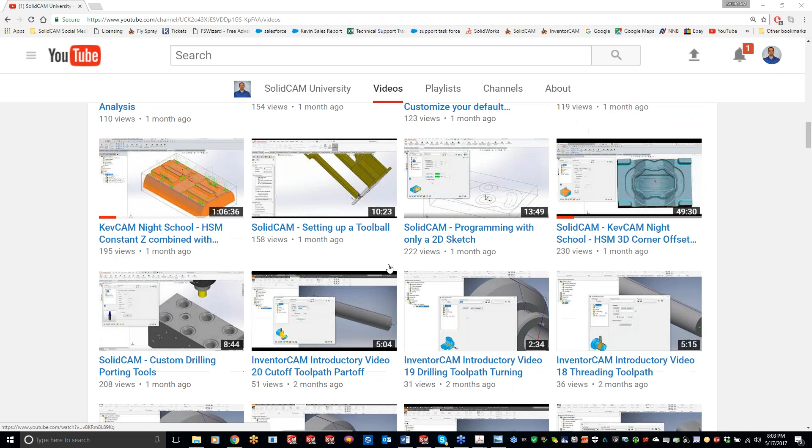But I guess with that said, we'll get going with tonight's class. Tonight is going to be HSS, morph between boundary curves and morph between adjacent surfaces. These are actually two of my favorite toolpaths in HSS, well actually in all of 3D, just because you have so much more control when you're doing morph between boundary curves, stuff like that.

Now, let me just look through our list here. I was going to wait, so last week we were talking about adjacent surfaces, or I'm sorry, perpendicular to a surface. And it kind of got to the point where we came up with some good examples, but in the real world I couldn't come up with something where I'd see a benefit out of it. And actually, Ronnie Kidder sent me over a picture.

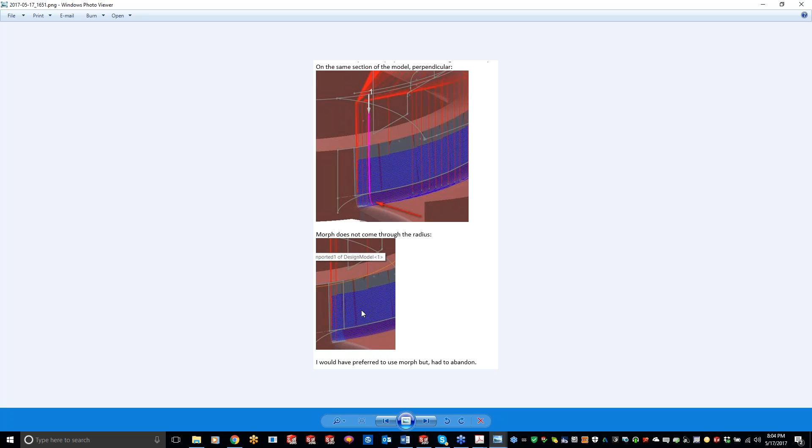Unfortunately I don't think Ronnie is here yet, but I'll open up this picture here for you guys, it's just a little screenshot. What he was actually doing here is he was working on this radius right here at the bottom, and he was doing a morph on this bottom, kind of what we're going to be covering today. You can see he's getting a lot of retracts coming up and down over here. So what he did is he switched it over to perpendicular, and you'll see it really cleaned up the toolpath. Unfortunately I can't zoom in here for you guys, but you can see right here we're not getting that jumping around like we were up here.

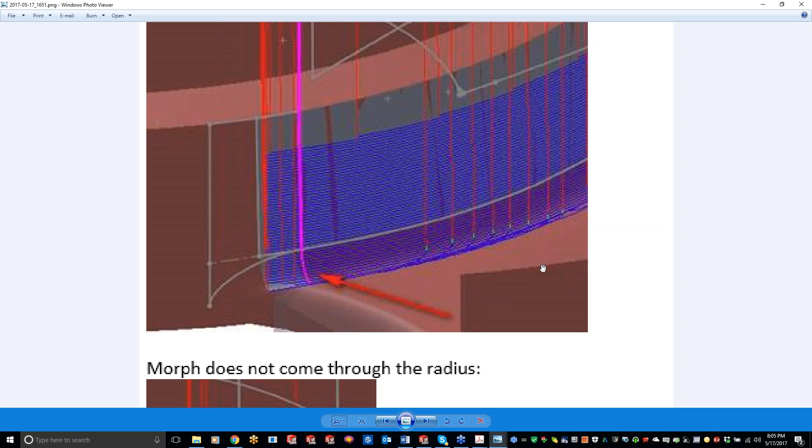So for those of you that were in last week's night class going over that, here's a good example right here. So, okay, we'll get the ball rolling here.

First thing I want to do is start off with parallel to curve, doing the exact same parts, and show you the difference between using parallel to curve versus morph between two curves. So what we'll do is go to HSS and do parallel to curve.

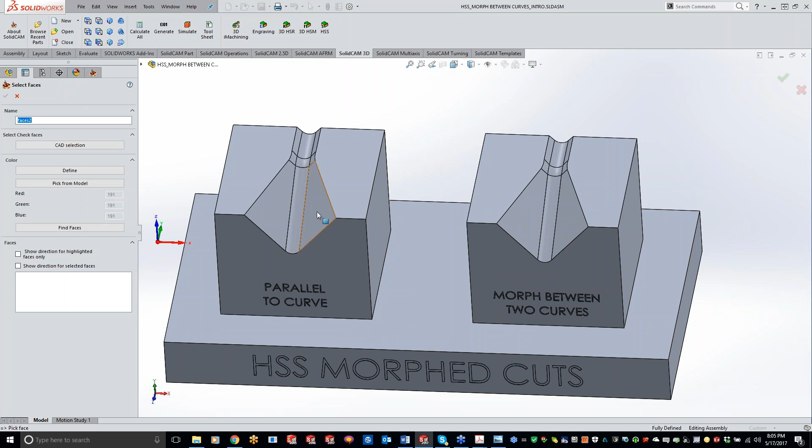My drive surface is the surface I want to cut, so I'm just going to grab my surfaces real quick. And my edge curve, I can pick either the left side or the right side here, but I'm just going to grab this left side, and we'll continue that right there.

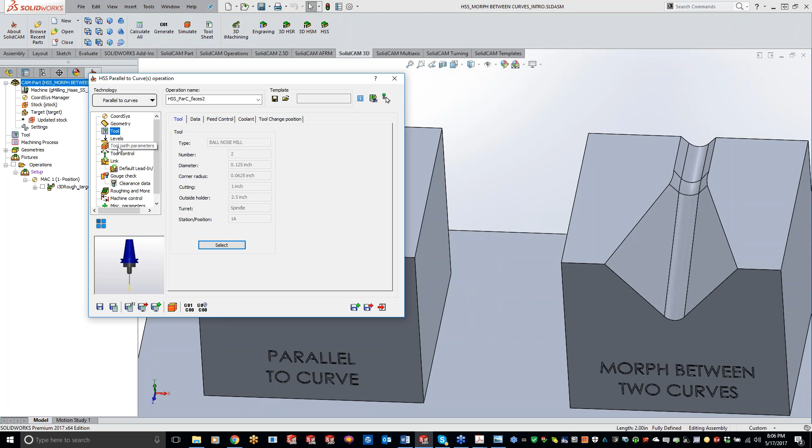Let's go ahead and grab a cutter here. I'm going to skip levels like I normally talk about. After I grab my tool, I'm just going to do save and calculate, and let's see what we have so far here. So we got a lot of bouncing around at first.

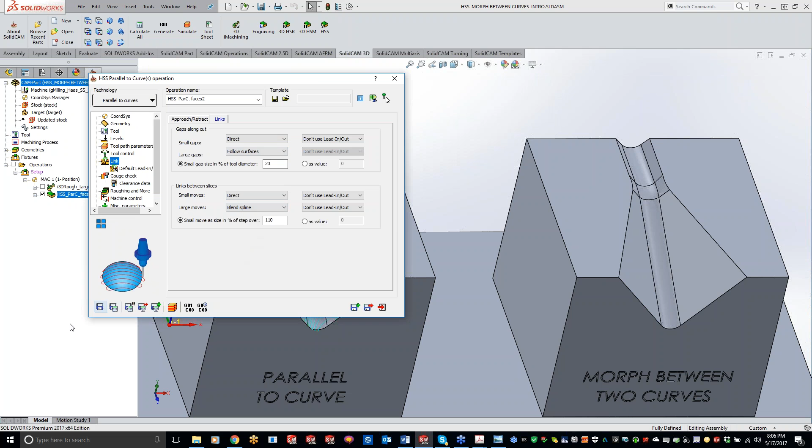So what I want to do is get that cleaned up first. Like we've talked about in the past, that's going to be in your links section. So let's clean up our links. For this top one here, we'll do follow surface, and for this bottom one, we'll do a blend spline. This should clean up all of our retracts. So now we got our retracts all nice and cleaned up.

But here's the one disadvantage of using parallel to curve on a particular surface just like this one. If we do a top-down view, you'll see we're going along with the surface right here of that edge line, but as it gets going out, it fades away. So if we do a top-down view for you guys here, you can see we got a nice toolpath on the left, but once we get over to the right side, we're not looking as good as we should be. So to accommodate that, that's why we have the morph between boundary curves.

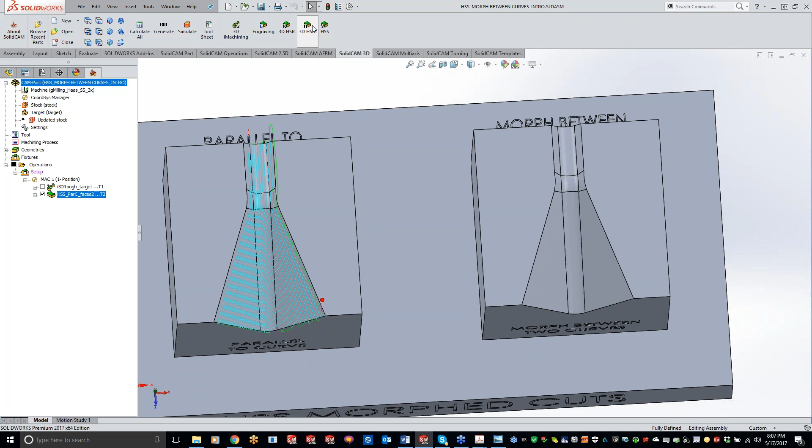So let's exit out of here and do a morph between boundary curves. Geometry, I can just grab the geometry I grabbed before, or I can just click on the surfaces, doesn't matter. And I need to switch this over to morph between boundary curves. Sorry about that.

Okay, so your start - now the start is where do you want to start your cutoff, and basically the end is where do you want to end the toolpath at. So for my start edge curve, I'll just grab this line right here, and basically what I'm telling it to do by clicking that start is I'm telling it to start over here and work its way over to this side. The toolpath will actually follow along those curves of that surface.

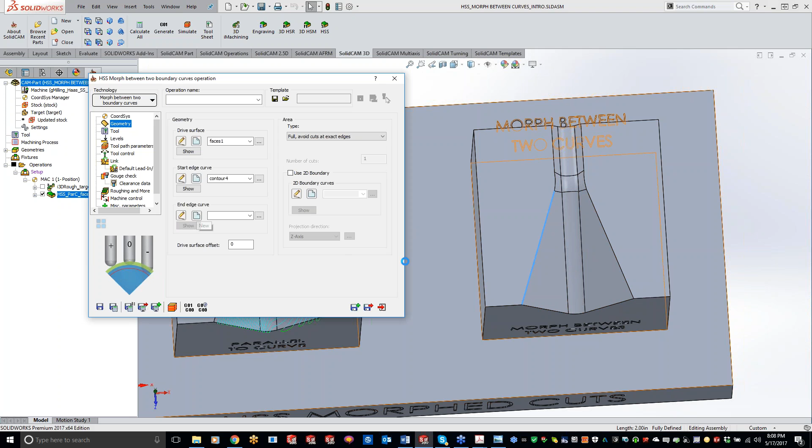So we'll come over here and we'll do our end. Okay, so now let's go ahead and grab a tool again. And for toolpath parameters, we'll do a save and calculate and see what we're looking at here.

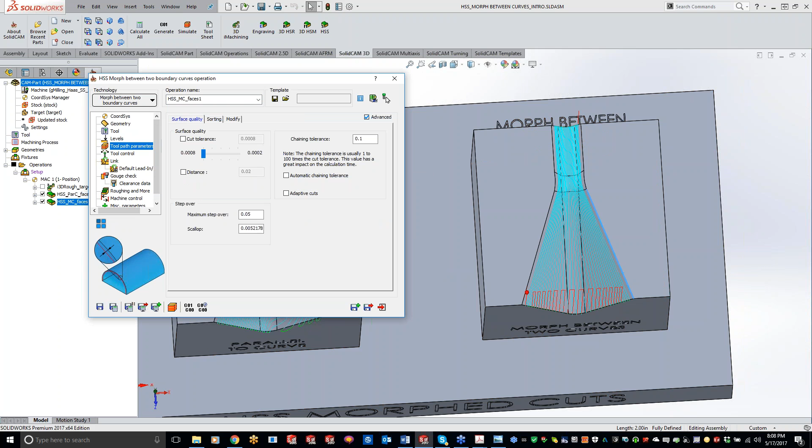So what we'll do here is, we do have a little bit of retracts you see just at the front half right here. So let's go to our links, and I'm just going to do the same thing as what we did before, follow surface and a blend spline. Okay, so that will clean up that toolpath.

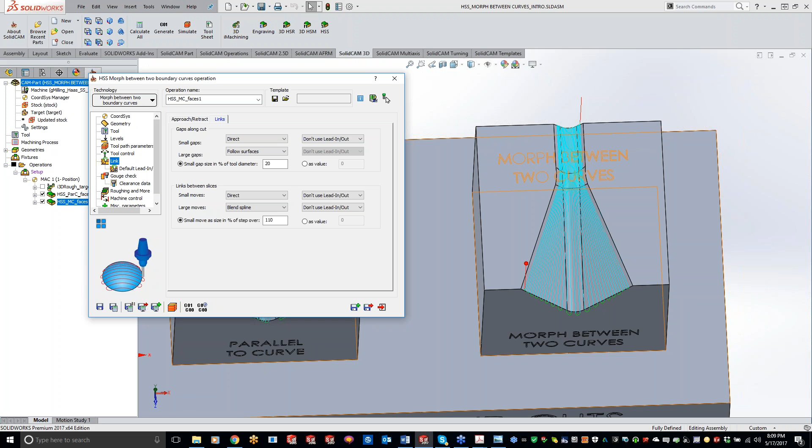And sure enough, Ronnie shows up. Ronnie, I was just talking about you and your part, showing them the part that you ran across.

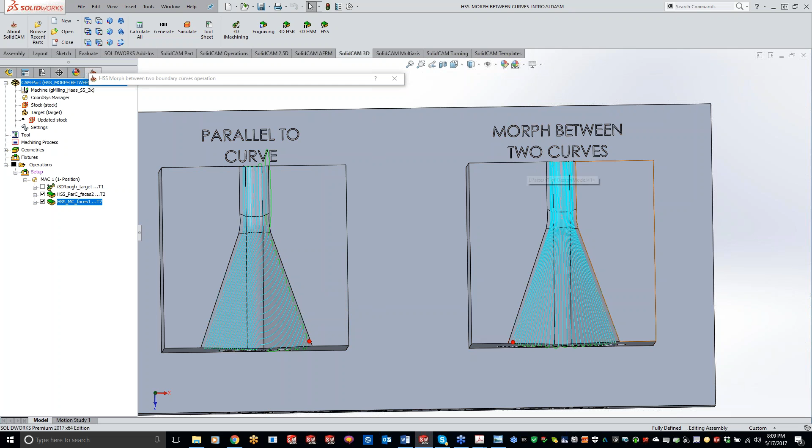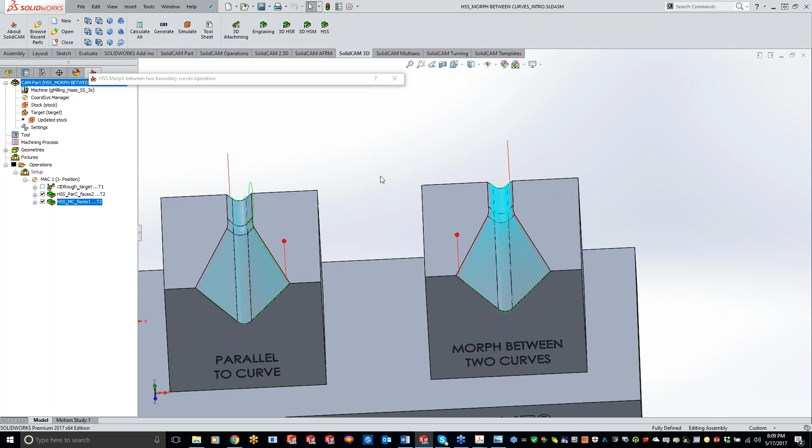Okay, so now if we do a top-down view of what's going on here, you'll see over here like we're following along, but since we're doing a parallel to that curve, as it gets over here, it gets kind of scattered. With morph between two curves, you'll see the toolpath really follows along the entire geometry right there. So as we go back and forth right here, it's following along that surface just perfect. You can see it following along here, working our way down, up and around, going all the way through. Now, like I've said before, get your guys' toolpath looking the way you want.

Grab your geometry, grab your tool. Do a save and calculate first, just to see what you got, and then come over to your links and straighten out any issues—you guys can do follow surface, blend, or direct, but definitely come in here and get those cleaned out. Then last thing is come over and tighten up your maximum step over. If we're looking for a nice finish here, we can just do 10 thou.

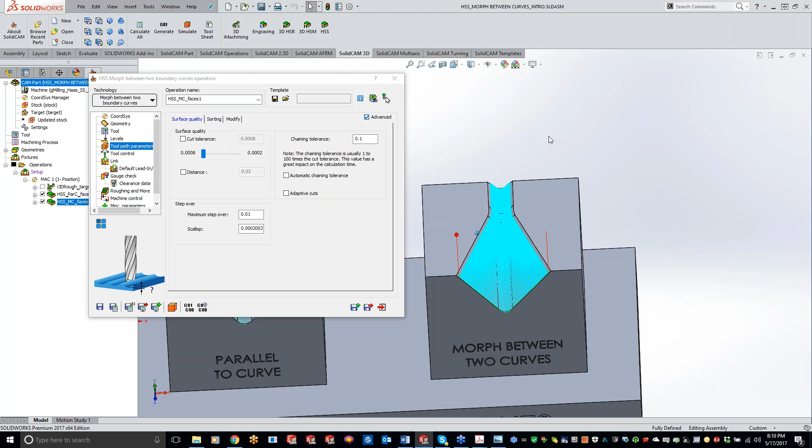Save and calculate, and now we're going to have a real nice finish going through that entire part, following along that geometry. So your start curve is where you want to start the toolpath, and your end is where you want to end it, and it's going to follow those curves exactly.

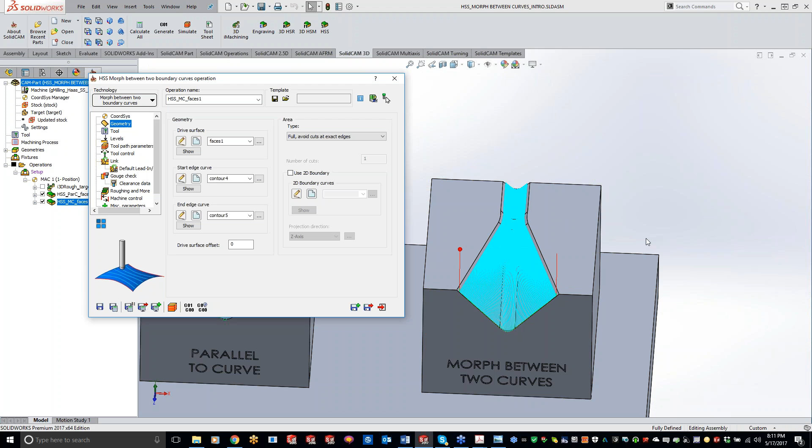Really easy to use. This is kind of one of my favorite ones just because you have so much control right here. I also like using this one if you had a radius around the entire outside of a part. What I would actually do for that is your start would be the top of the radii and your end would be the bottom.

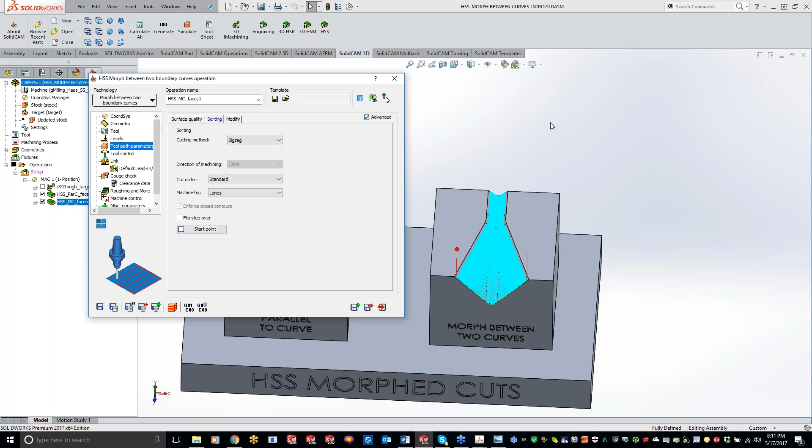Then what I would actually do is come over to my toolpath parameters, and instead of doing a zigzag, I would do a spiral. We'll actually cover that spiral one next. But any questions on this particular part and the comparison between parallel to curve versus morph between two curves?

Okay, perfect. So let's go ahead and we'll go to our next part here, and grab this guy right here.

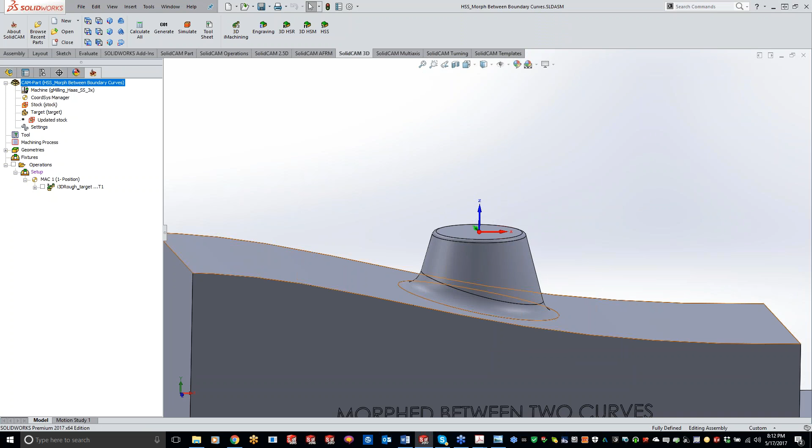What I'm going to kind of do is go along the same lines here—I want to do a parallel to curve and show you guys the difference, and then do a morph between boundary curves. So for this one right here, we'll just do a parallel to a curve, and I'll grab my 3 surfaces that I want to cut here.

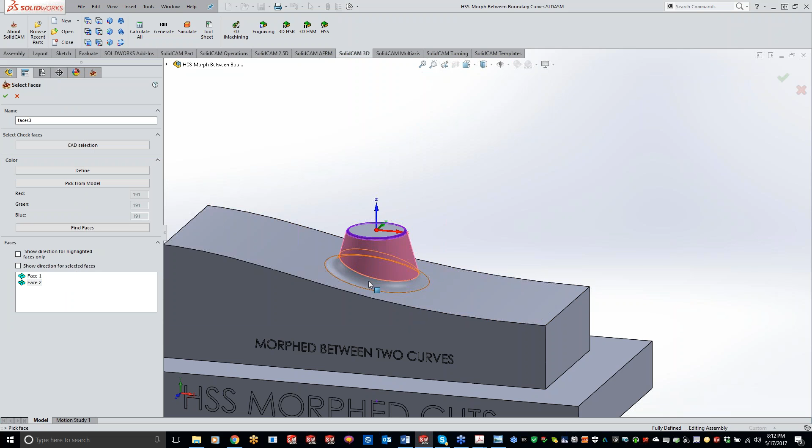My edge curve is going to grab the bottom right here. I could have picked the top—it doesn't really matter here. Now tool. Let's just do a save and calculate and see what we have going on here.

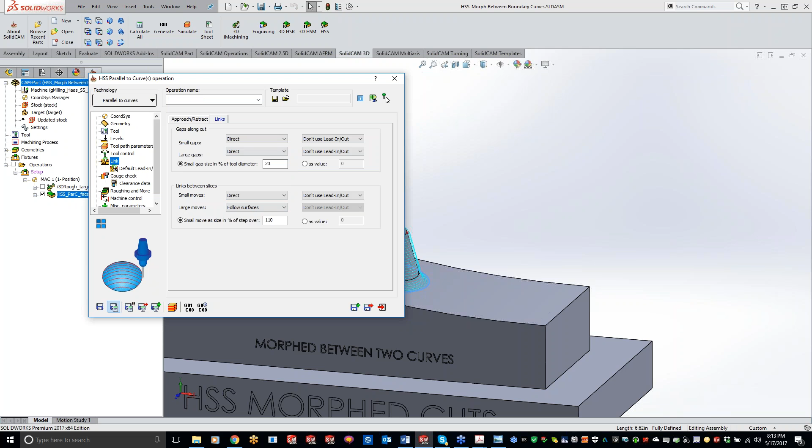So definitely getting some retracts here going on, so I'm going to get those cleaned up first. If we go to our link section here, for this one let's just try doing direct, and let's just do a follow surface. I'm just going to kind of push this part over here.

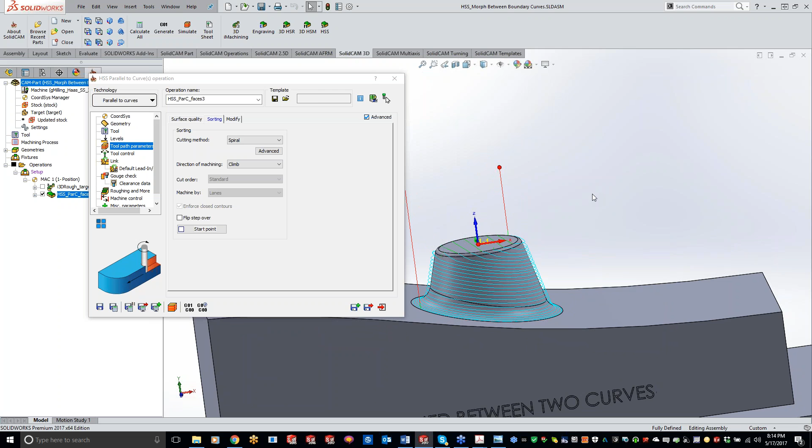So now you'll see, and I can clean this up a little bit better here—you'll see that I'm just doing a direct step down, starting at the top, working my way around here. Now if I go to my toolpath parameters, we'll switch this over to spiral. So we're spiraling down on the part, but you'll see it's not an optimal toolpath—we're kind of coming up over this flat where we've already cut.

So to fix that, what we can do is just do the morph between boundary curves. So what I'll do is grab our morph between boundary curves here.

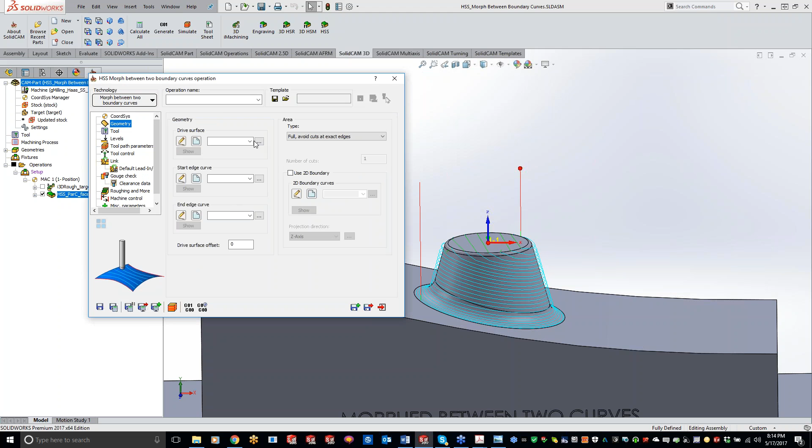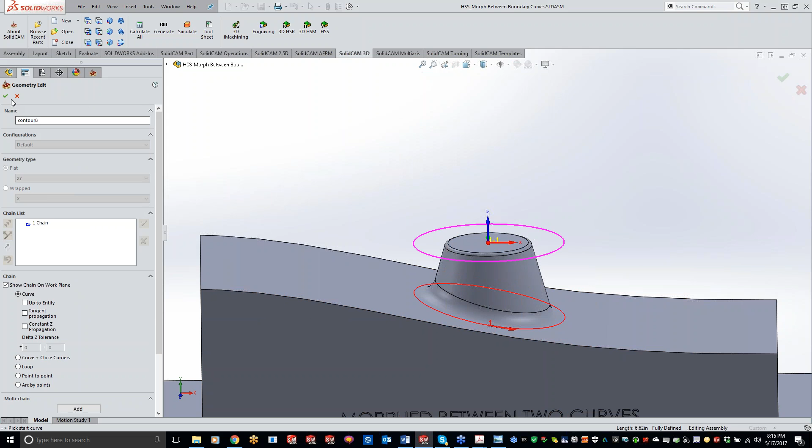And I can grab that same geometry here that I just picked. Now I'm going to turn off that toolpath, and my start is up here, and my end is going to be down here. So this is where it really comes into factor, since this island is kind of sitting up at an angle, this really comes into factor of your maximum step over.

So I'll get some toolpath on here and show you what I'm talking about. Right now, looks like our links are good to go. To clean up our toolpath a little bit and get a little more proficient, instead of just going around and stepping down, going around and stepping down, I'm going to get it so it stays in contact with that material, and the transition will be much smoother. So I'm going to switch it over to spiral here.

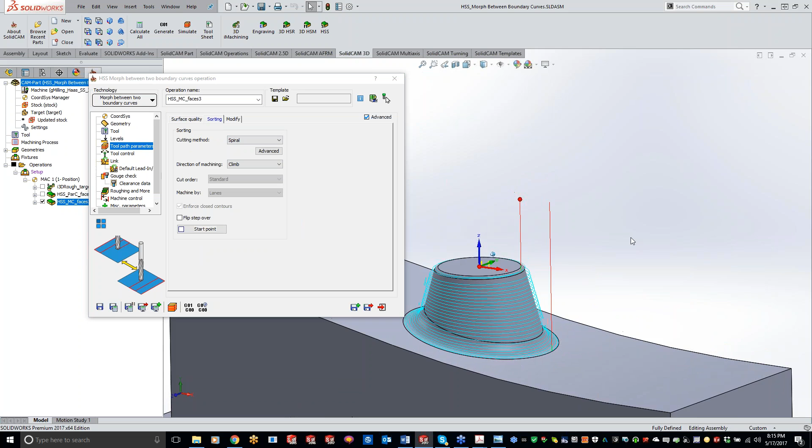Okay, so you'll see how much nicer that toolpath is looking, and it's following the surface of what's going on there. So we have basically a straight up and down start and an angle, or an oblong shape at the bottom here, and the geometry kind of contours to it.

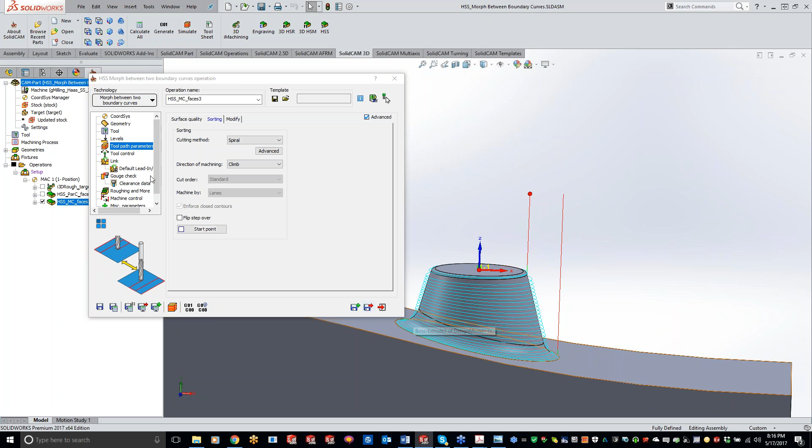So over here, our step over, when we have our toolpath parameters, our max step over is set at 50 thou right now. So we might have 50 thou over here, but we might need something a little bit smaller over here to accommodate that.

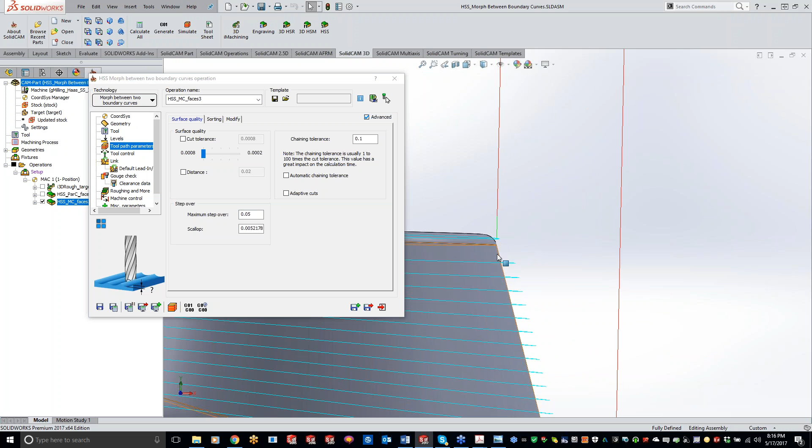Now, looking at this part, if we get a side view here, you can see we have a gap going on right here. The only reason we have a gap is because we're working on the tip of the tool towards the top, and then as it moves down the side, we're working on the side of the cutter. So definitely don't be alarmed by this at all, it's just because it's switching the contact point.

Now, if I wanted to lock it down, I could do it just at the radius, or I could do it at front. But since it's set to auto, it's automatically going to switch over. Now it looks pretty significant right now, but you have to remember we have a pretty large step over.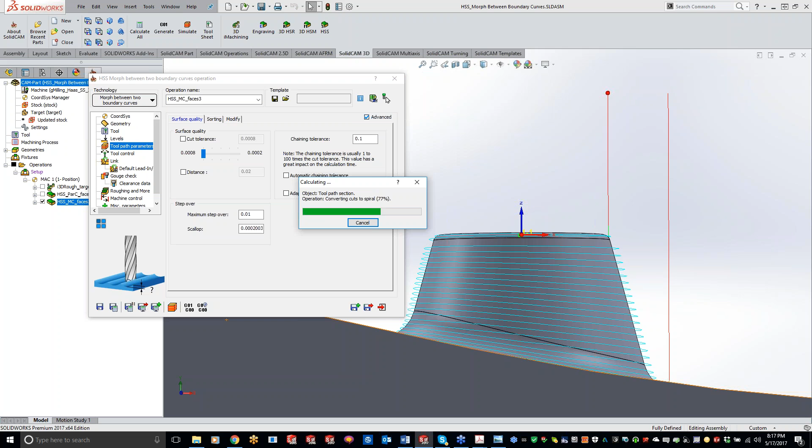So when we come back in here and finish this up, if we do a 10 thou step over, we have a nice clean toolpath going around here. And like I said, you'll still get a little bit of a gap right here, but it's just because it's changing the contact point of the tool as it's working around on that radius.

So like I said, we're working more of the tip of the ball down here, and then switching over and moving to the side of the ball going down right here. So does that kind of make sense for everybody?

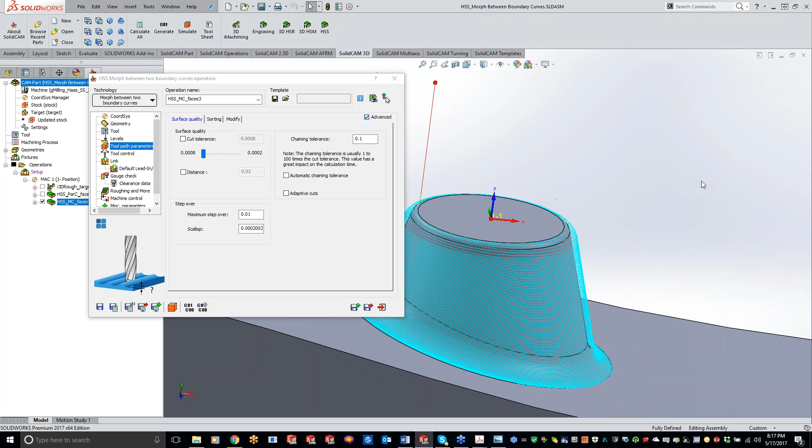Now, if say we don't want to touch the surface at all right here, we can come over to our gouge check, turn it on, and tell it not to touch this surface right here, which it shouldn't be touching right now. We do a trim and relink. There we go, so it's guaranteed not to move into that bottom half right there.

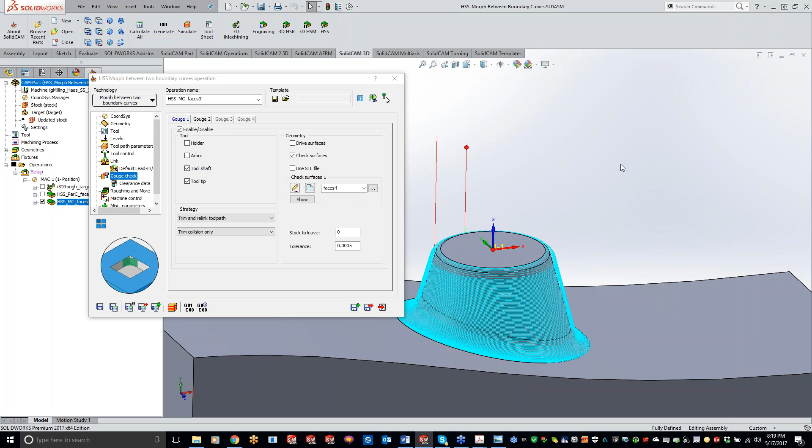Okay, so any questions on the difference between parallel to curve versus morph between curves, and when you'd use it, or anything like that with this part?

Okay, so let's go ahead and carry on to our next part here.

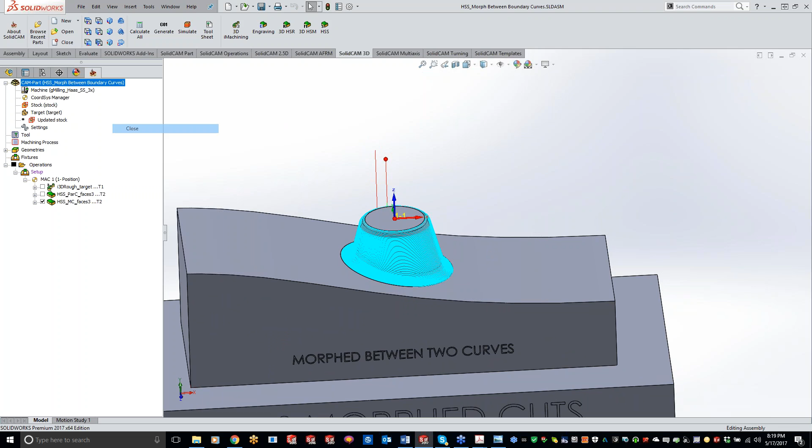And this part right here, I think this is the one I want. Yep.

Okay, so you guys will remember this part from when we did the constant Z and linear path, and we didn't get into the bottom half, and I told you we'd come back and show you that. So what I'm going to do here is break this up into two parts. You don't always have to break it up, but I'm going to do that and show you the difference of what's going on here.

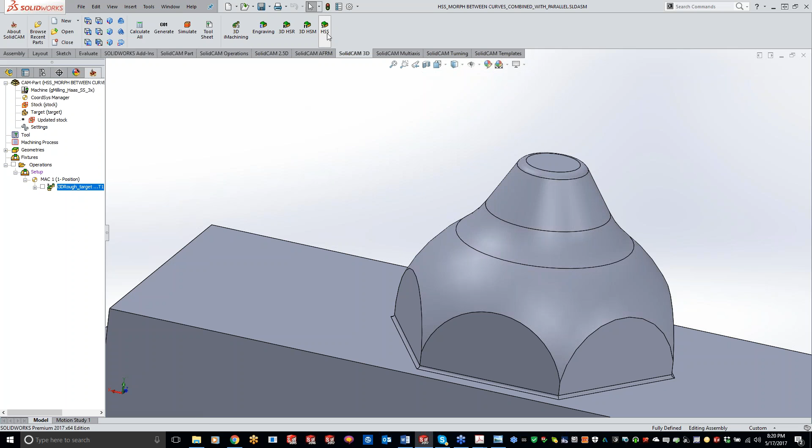So we'll just do an HSS here, and we'll do a morph between boundary curves. Now my geometry, I have it somewhere in my list here. And we'll do a start right here, and an end right here. Just give me one second here, guys.

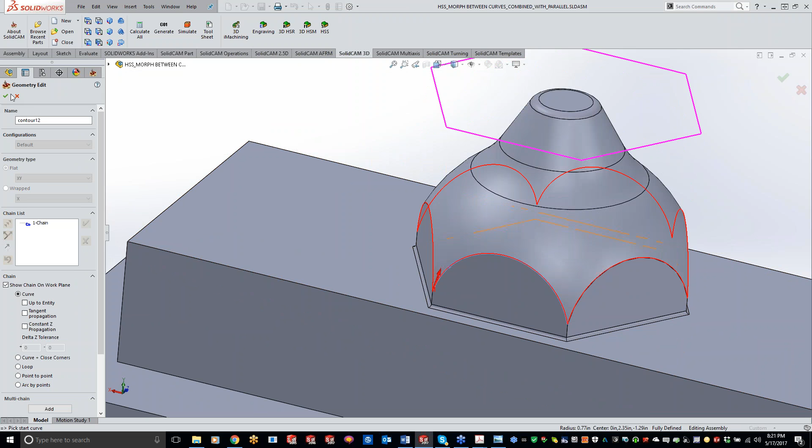So actually what I'm going to do is add this one in here. My start, I think I already grabbed it, and now my end is going to be down here. So we've got our hex and a round. Let's go ahead and grab a cutter here. And this particular one, I'm going to want to do it as a spiral.

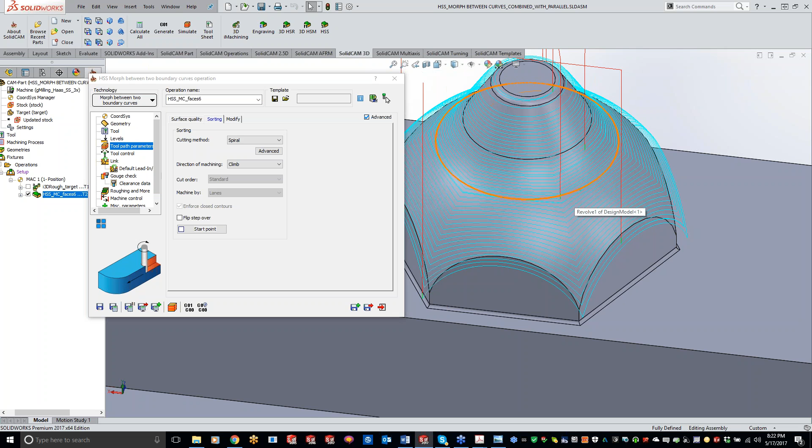Okay, so here's a little bit of an oddball example, but this is something I wanted to show you guys. When we are doing this, you'll notice that if we come straight down on the part here, that hex portion is really working its way up. It's working up too far. You'll see we're getting a little bit of retracts going on in there, and I can switch those over to follow the surface and whatnot. But for something like this, what I would rather do is break this up into two portions.

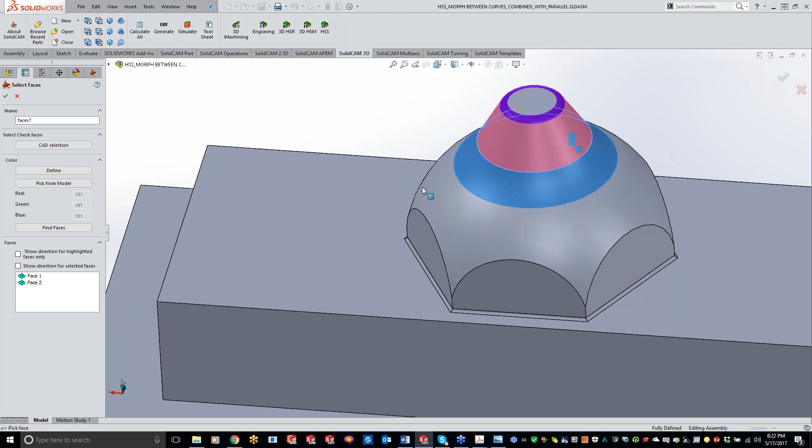So what I'll do here is turn off that toolpath, and we'll do the same thing. For my drive, I grab just the top half of that cone. My start will be the top, and my end is going to be down here. We'll grab that same cutter here, and switch this over to spiral.

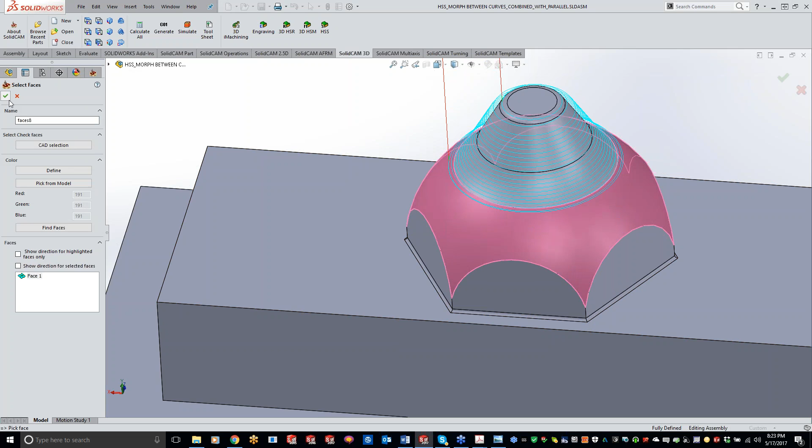Okay, so now we have a real nice looking toolpath going down up to that circle. So now I need to finish that portion off. What I'm going to do is save and copy, or start a new operation here, and leave it where we left off with that first one. So if I go to my geometry and grab that bottom piece here, my start's going to be where I left off with the original, and my end curve is going to be this kind of hex going on here.

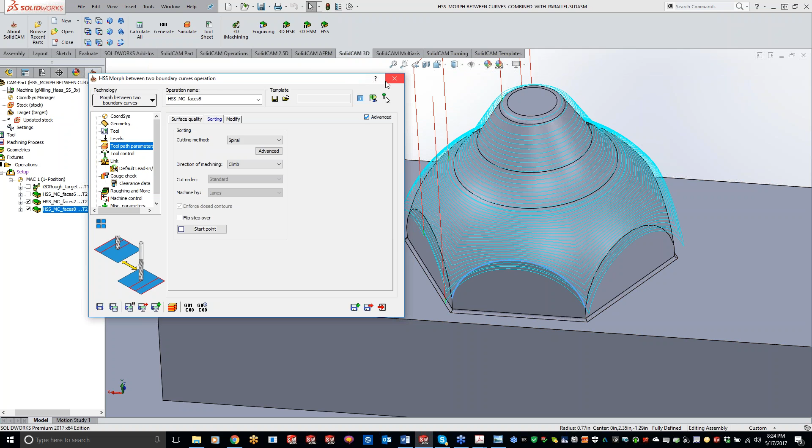And we'll put this back to spiral again. I'll grab a tool real quick. So this is going to be a much more ideal cut for this particular part here.

So you'll see that before, let's turn these off here, my hex was coming way up, even up into my circle here, and I'm not going to get a good surface finish when I'm doing these square points right here on a radii. So like I said, the best thing to do is break it up into two pieces here, so we have a nice smooth cone working our way down. And then since my new start is where I ended up with the previous operation, we're going into the circle, and now as we get into those hexes, it starts transitioning over for you guys.

So just thinking about a couple different ways to program stuff, like I said, we could do parallel to a curve on this one up here and get the same result, or do morph between boundary curves. But as the transition goes through here, we can get into a much nicer surface finish as it's following that.

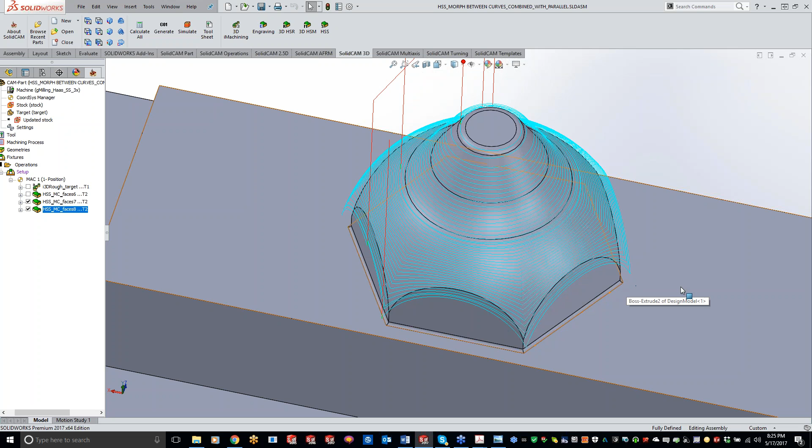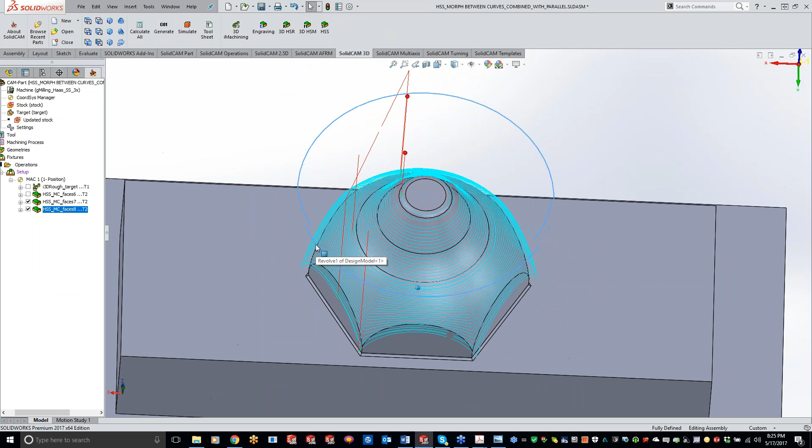Now, like what Ronnie was saying too, if we want, let's just do it as a test real quick here, let's just do a circle. Yeah, we'll just do a circle like that. I'm just kind of curious to see if we could clean up that first initial toolpath, or what we'll actually get here if we use that as our end.

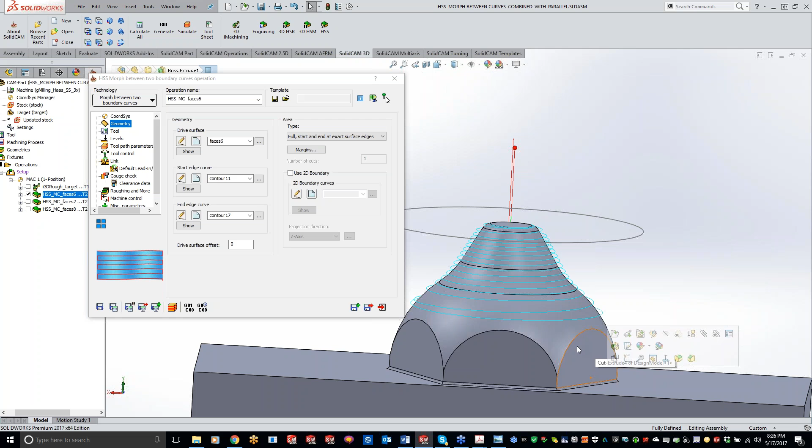Definitely get a lot of bouncing around there. Let's try cleaning up a little bit more, we'll do it at exact. So it cleans it up a little bit here, but we're not getting down, cutting our hexes like it should be. Let me zoom this part around here. Yeah, we're definitely not getting down into our hex area, just because it's trying to follow that circle geometry with that square, or that hex side of things.

So, definitely the best thing for you guys to do with this one is kind of break it up into two portions here, and you'll get that really nice surface finish that you guys are trying to achieve here. So, any questions on this part here?

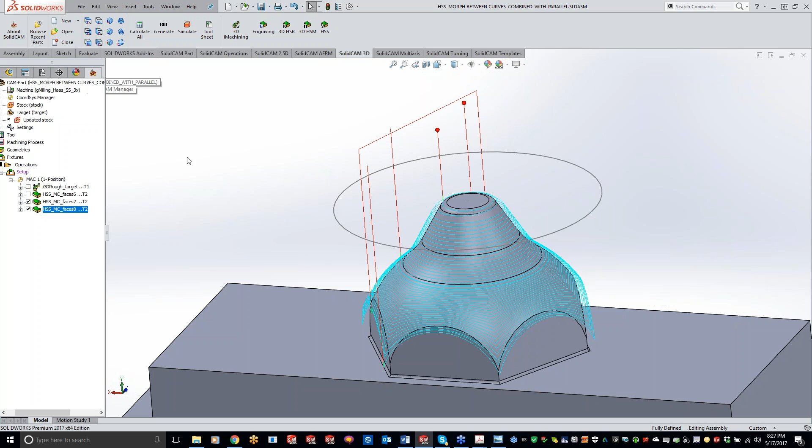All right, we're blowing through this tonight. All right, let's go ahead and hop out of here.

And now we will get into morph between adjacent surfaces. So right here, morph between boundary curves and morph between adjacent surfaces are extremely similar. This one's a little tough to find out a good part for you guys, also right here. The morph between adjacent surfaces is really built for the 5-axis, doing like impellers and stuff like that.

But you guys can most definitely use it as morph between boundary curves too. And this is one we'll really get into more when we get into cutting the 5-axis, especially when we get into the impellers, because this is kind of where the specific module is built for here. But we can definitely use it in a 3D setting here.

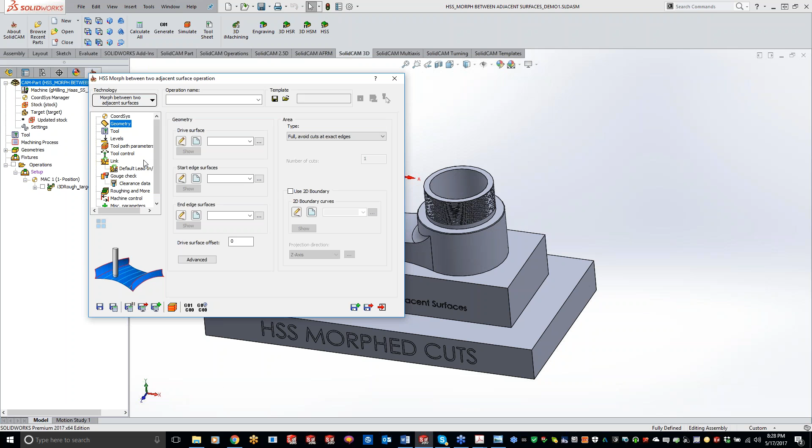So what we'll go ahead and do here is an HSS, morph between adjacent surfaces. It's basically the same thing. Click your drive - what areas do you want to cut? Your start surface - so we can do the left side or the right side first. Totally up to you how you guys want to do it.

We'll grab that as our end, and we should get the exact same results here. This is actually, if you guys can picture this, if anybody's into the dirt bike or snowmobile world, this is actually the piggyback shock in the reservoir, the cap piece for it there. There's a part sent in by a customer.

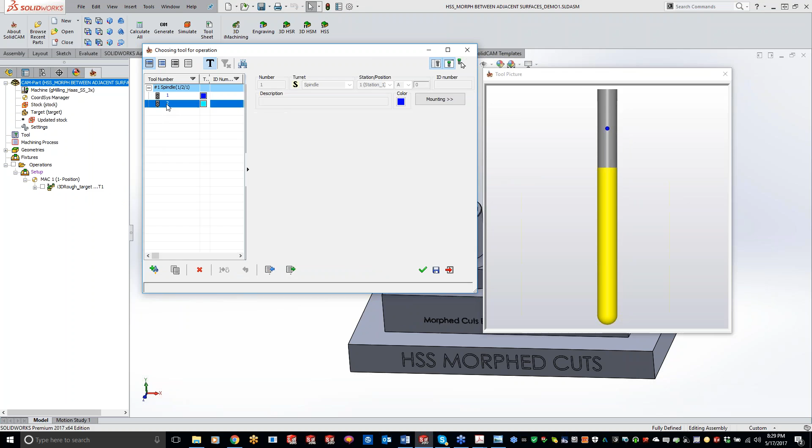And let's go ahead and grab a cutter here, and let's just see what we have so far here. Okay, so you'll see we're following along our surfaces here. Let's get our toolpath cleaned up a little bit first before we dive too far in here.

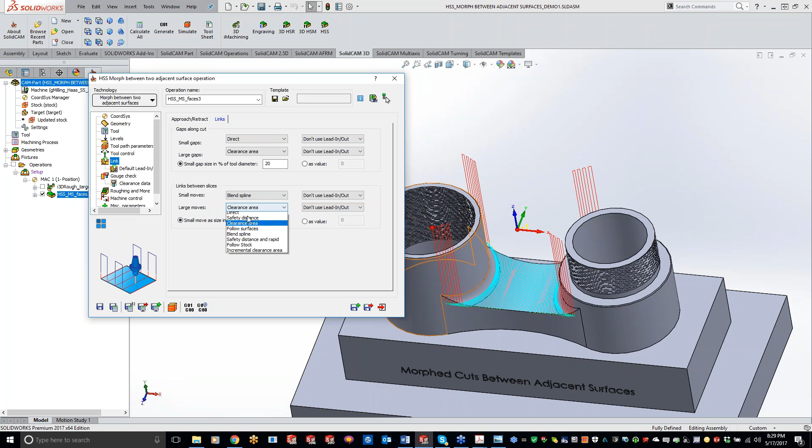So I'm going to go to my links, and for between slices we'll just do blend and blend. Okay.

So you'll see we're following the contour of that circle kind of going on right here, getting that radii cut out right here, and just working its way back. Now as it gets into the center, our toolpath actually straightens out here and now starts curving back towards this surface over here. So, real similar to morph between boundary curves, but you can also think of it as this is a check surface too.

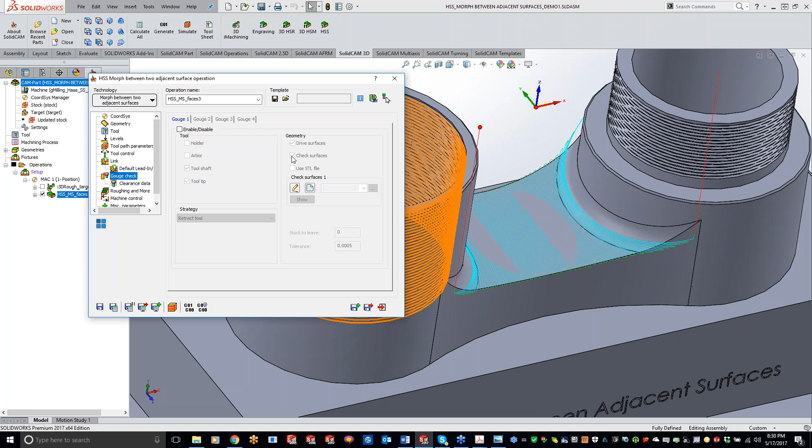So when you guys go to click on the surface, it's actually a check surface. So it's the same thing as if you guys came over here and turned on your gouge check for your check surfaces there. So it's not going to touch that wall at all, but it's going to get right up next to it.

And this one I had to do a little bit of reading up on, and the specific term is: the toolpath is generated between the check surfaces and evenly spaced over the drive. So it kind of uses this as a check surface - this is the drive that you want to cut, and it just cuts into everything in between, following the contour of what's going on there.

Now this is something a little bit funny here. So when I first got this part from the customer, I was noticing - you guys will kind of see right here - I've actually got toolpath that looks like it's going through the part. So what I did is I came in here and turned on my drive, or my gouge check, saved and calculated again, and it's still showing up for me.

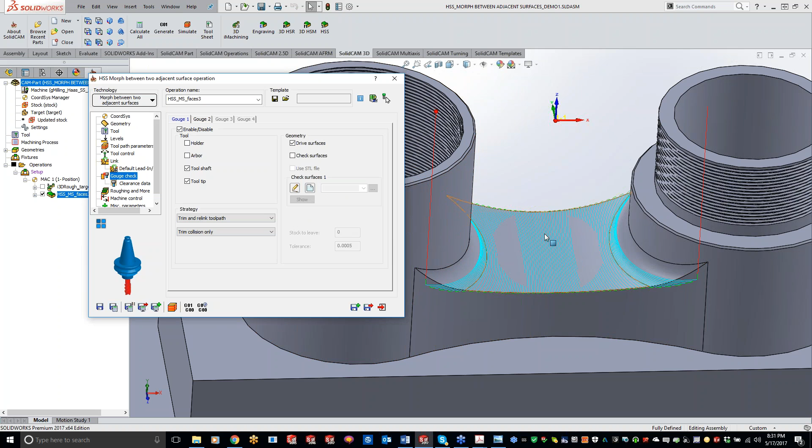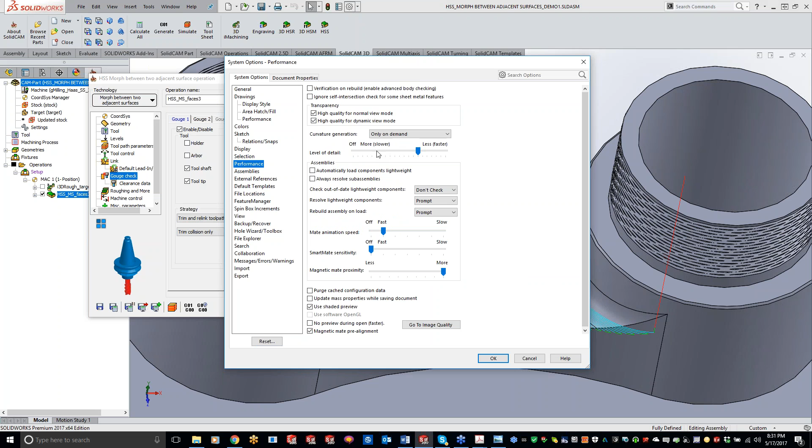Well, one thing that I wasn't watching for is, as I zoom out, you guys will see my toolpath all reappears. As I zoom in, it kind of goes away. This is kind of a SolidWorks setting here under your performance settings. So if I move this to more accurate, then it will show up like it's supposed to. But something to do with this particular part and the accuracy of the SolidWorks model is actually showing it sinking in there.

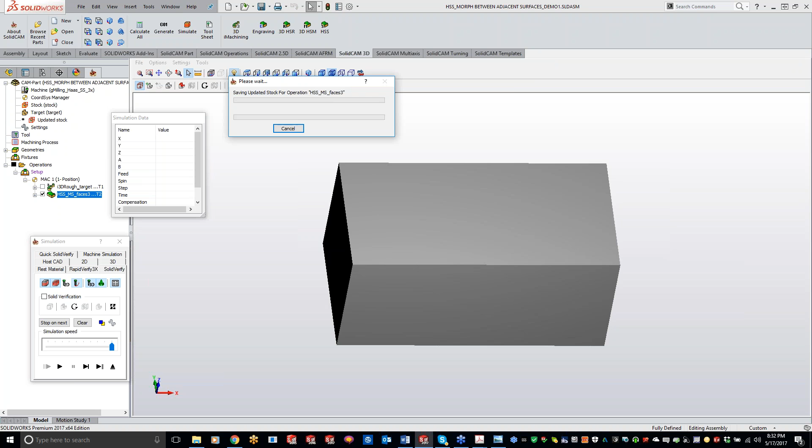Let me just play this one through and we can actually see it too. Simulate this. I'll just have to give it a second to update from that 3D machining here. Okay, so we got it nice, clean, and cut in there. And like I said, we're still stepping over fairly large right now.

If we do a stock target comparison here, everything's right up to size. And I got my tolerance set a little bit large right now. Now, it looks like in the center here we could be leaving just a little bit material, but we're at 4/10. I have my accuracy set to 1/1000, so it could just be a tolerancing issue.

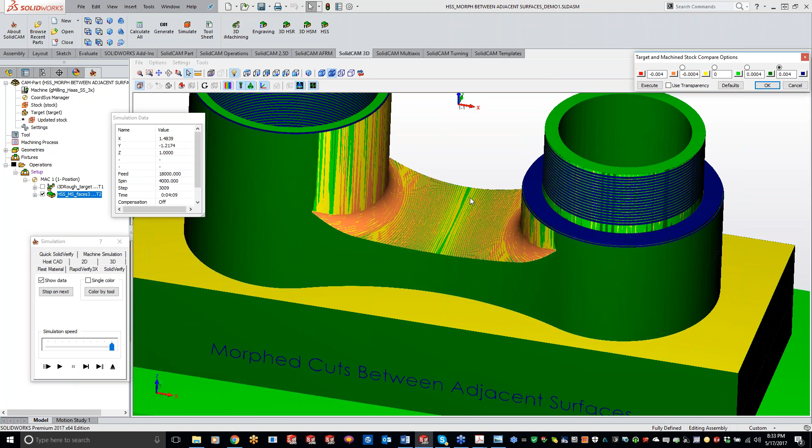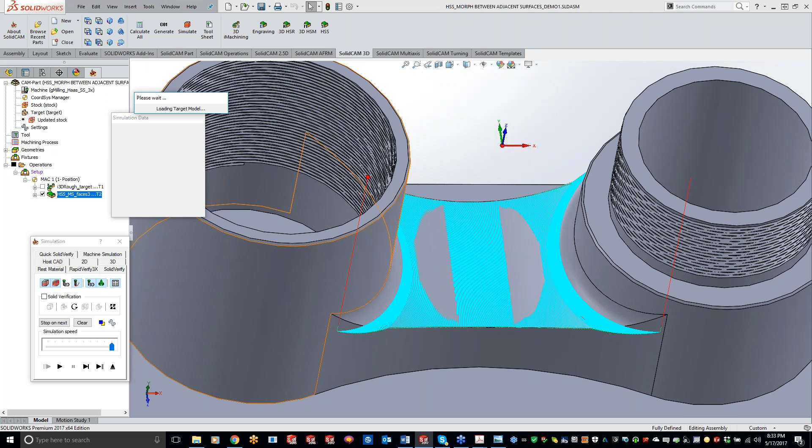But to get that smooth, beautiful finish, last thing I want to do is come in here and change up that step over there. And now if we do a simulate, we get nice and cut in there.

Just trying to see if it's just graphics. Yeah, it looks like we're all good here. Looks like it's just the shiny part of the center here. It looks like it's almost gouging in. I don't know if you guys can see that or not, but let's go ahead and do a stock target comparison here.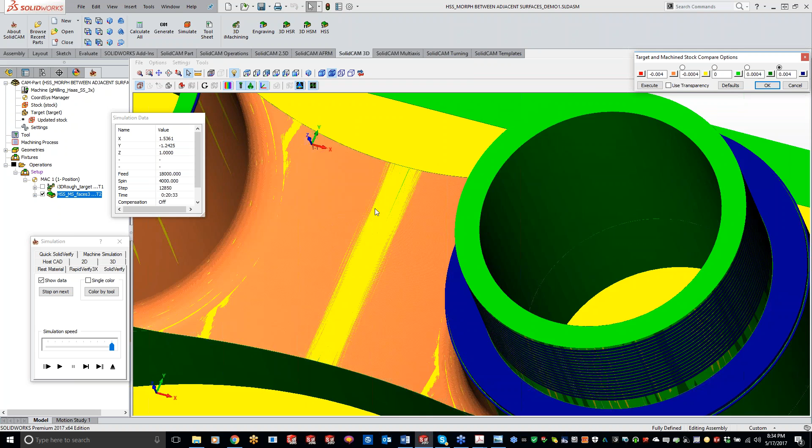Yeah, and we're cutting right up to size. Like I said, I have my tolerance set at 4/10. So if I'm seeing any yellow, orange, or light green on this particular part, I'm pretty much machined right up to size here. Now, obviously, I got a darker blue here where I got some material left over, and on my threads still got material left over, but I just did a quick 3D iMachining to get all that material out of there. Any questions, guys, on this part?

Unfortunately, this is the only one I actually have for morph between adjacent surfaces, just because they're so similar between morph between boundary curves versus adjacent surfaces. And like I said, the morph between adjacent surfaces is more geared towards the 5-axis impeller portion of it. And like I've said before too, the only difference between HSS and 5-axis is just in your tool axis control.

There's another box that's opened up right here. So for those of you guys that are a little intimidated by the 5-axis, once you get through the HSS, the 5-axis is pretty easy for you guys. So, but any questions, concerns?

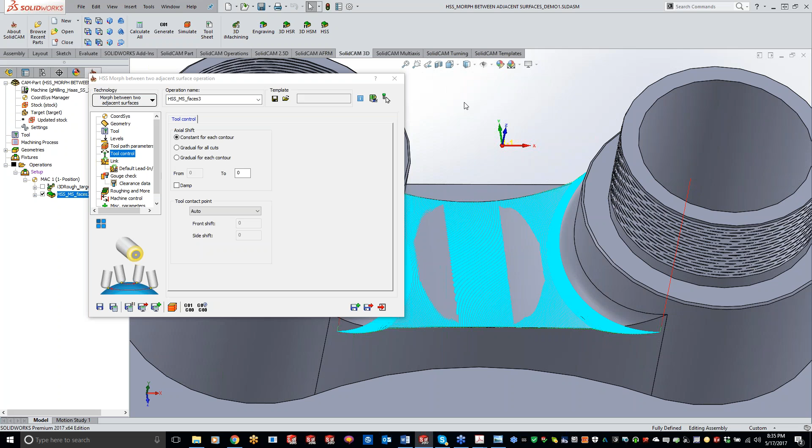Anything that I missed or that we should recover here? Said a little shorter than normal here. Not going the full hour, looks like, with this one, but I'm trying to give you guys as many parts as I can to show you the difference here. And like I said, with the morph between adjacent surfaces and morph between boundary curves are so similar that you're not going to be able to tell much difference there, I guess you could say. But like I said, it is using these circles as check surfaces.

No questions, guys? I see we got a couple people that have hands raised. Let me see here. If the tool is y-axis, so what do we do? Is the question from Mr. Desai. If the tool is y-axis, so what do we do? I guess I don't quite understand that question. Can you give me a little bit more of what you're looking for?

We'll see if we just hold on and see if we get a response from here, and I'll chime in if we've got it.

Yeah, Mr. George Lauer, I opened that big file that you sent me, and I think George sent me this file, and it's a character. I can't think of the name of the character right offhand, and I'm sure he'll pipe in and tell me what that character's name is. The character came in at, was it 56 feet tall, I think it was? It was an STL file of, I can't think of it right offhand. Trying to think. Here, let me, as long as we're kind of waiting here. Yeah, Baby Groot, there you go, from the Guardians.

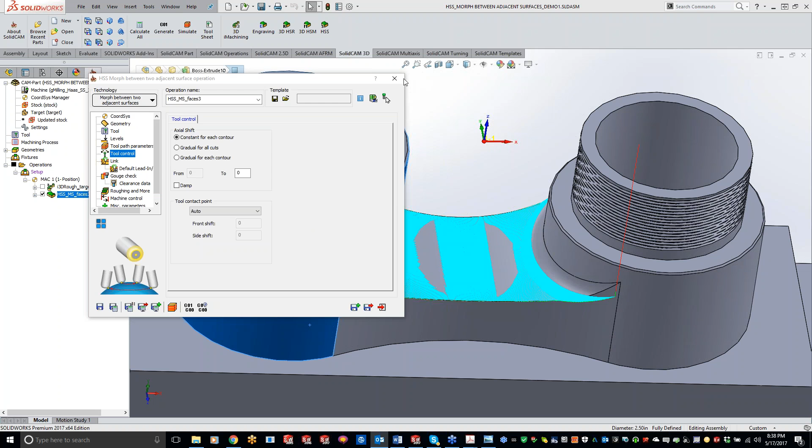Yes, to answer your question, yes. That's where you're going to want to use your keyway cutter, your morph between boundary curves. I don't have a keyway cutter set up here, but the inside curve is going to kind of be your start and end. Now, one thing I've kind of lost focus on, and I should have had a part built for it,

is HSS is the only toolpath out there that will do undercutting. So if you guys had a taper, if this cone was actually a taper going down at an angle here, and you guys were using a keyway cutter, or like a lollipop cutter, HSS is going to be the only one you're going to want to use.

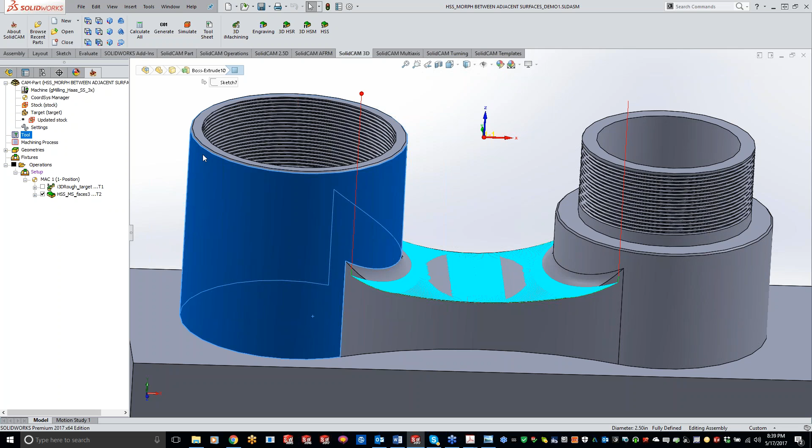And for that angle, let me reread it here. Have you ever tried cutting an angled bore through a part using a radius keyway cutter? Have it programmed ready for a part right now, and it looks good. I've just never tried using a keyway cutter in this fashion. Yeah, and to kind of explain, the keyway cutter is kind of like a slot mill with a full radius.

So let's see, we are at a 0.25. Oh no, I did cutting height there. Here we are. So is this kind of what you're using right now? It looks like, okay, sounds promising. This is the same way I programmed the part.

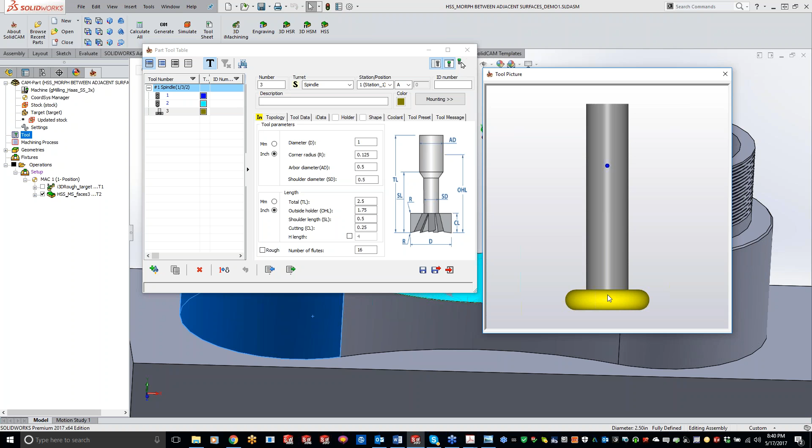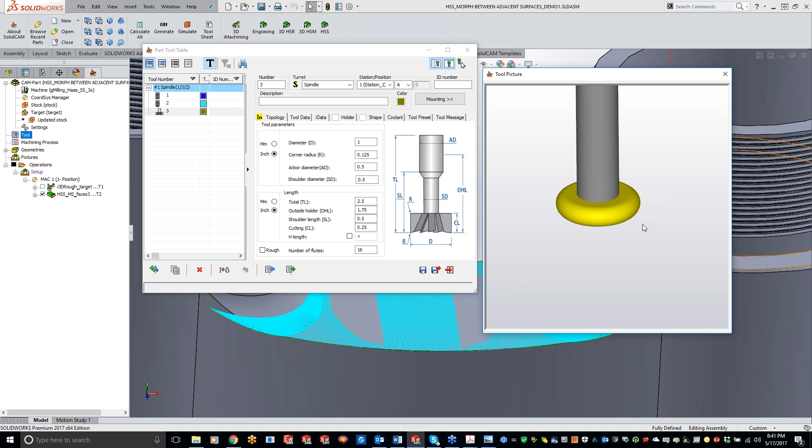Okay, so what he's trying to do is taking a full radius keyway cutter and coming in at different angles and stuff like that, and absolutely, especially if you guys can see where my mouse cursor is, if you're cutting a radius like this, definitely you can use that tool. Same thing for doing those undercuts I was talking about, this is going to be your go-to tool here, or like I said, a lollipop cutter.

So when you're doing that cut, just keep in mind, let's see, no we don't want to save it, make sure you go to your sorting and switch it over to a spiral. So you keep that tool in contact, doing a nice spiral in there, and you should come out with a really nice finish.

Oh, George said it was 56 millimeters high. Yes, he did. And if you guys want, give me one second here and I can show it.

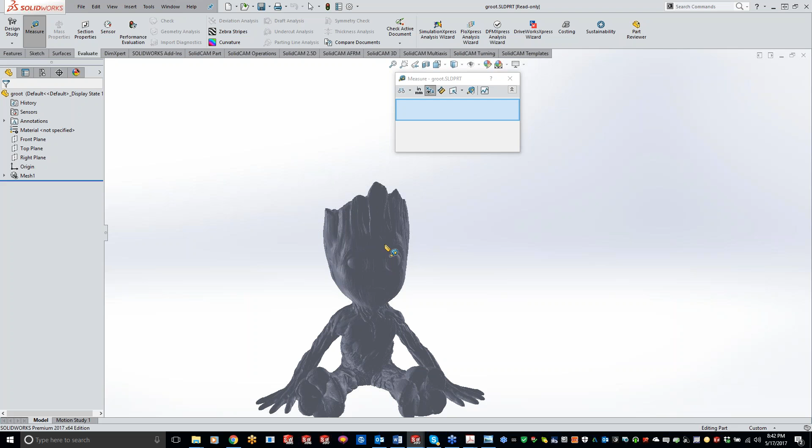Big file, baby Groot. Groot, or Groot, I don't even know what these characters are. Yeah, you're missing out, man. You got to go see Guardians. Yes. Oh, that's awesome, that is awesome. So here is baby Groot. And now if I click, I could have sworn I measured this out and it was much taller. Let's go to measure here and go to the bottom of his butt here. Oh, it's a mesh, I can't get it right now. But so there's baby Groot, or did I say it right? Groot, yeah, Groot, you got it. That is fantastic looking too. That is, absolutely.

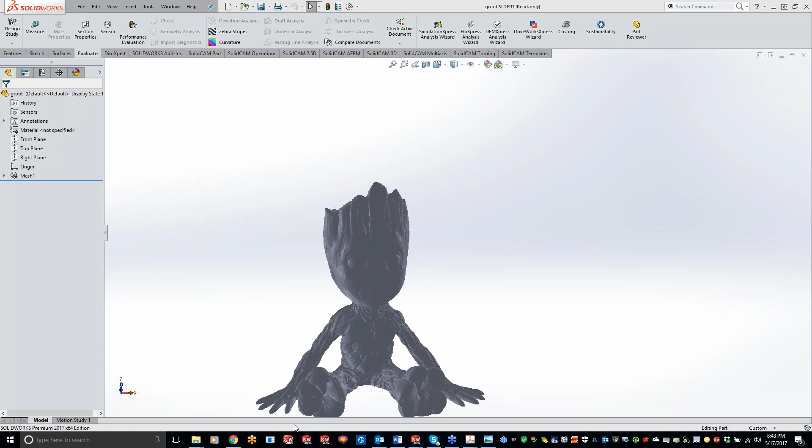So, okay, Ronnie got on. You can also use a circle segment cutter. One example is a barrel type, it has a large 2-inch radius. Ronnie, do you have a picture of that cutter by any chance? Ronnie's given a recommendation of using almost a different tool here, a barrel type. Okay, so he's telling me to go to a website here. Yeah, so let's just type in Emuge.

And in mills, barrel type is essentially a lollipop with an ellipse instead of a full circle. Okay.

He's giving you a link there. Yeah, thank you, Ronnie. I'm really curious to see what this tool looks like.

So is it a taper kind of ball right here? Because it looks to me like it just has a quick barrel. Okay, so it gets wider right here and then narrows down. Okay, God, I've never seen a tool like that. Very cool, let's see.

A few months ago there was a big article on them in Modern Machine Shop, and I would assume these tools work great, obviously they're doing a write-up in Modern Machine Shop. For Mr. Canyon, sorry if I butcher your name here, let me put this link in the GoToMeeting chat so everybody can have it, and that way you can try that out too. But yeah, thanks, Ronnie.

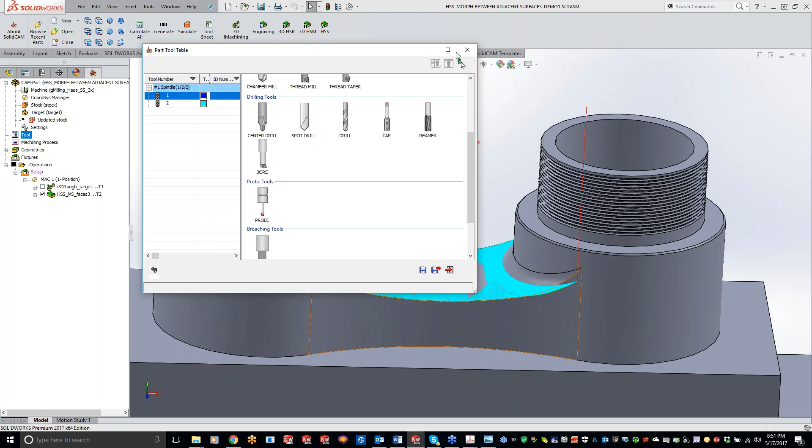Now, next week we are going to be covering the last portion of HSS, I think. Yep, so we're going to be doing projection, user-defined, radial, spiral, and offset. I think I have these all grouped together. I can't remember right offhand if I did group these all together in the class or not, but we'll be covering these next Wednesday, so definitely check it out there.

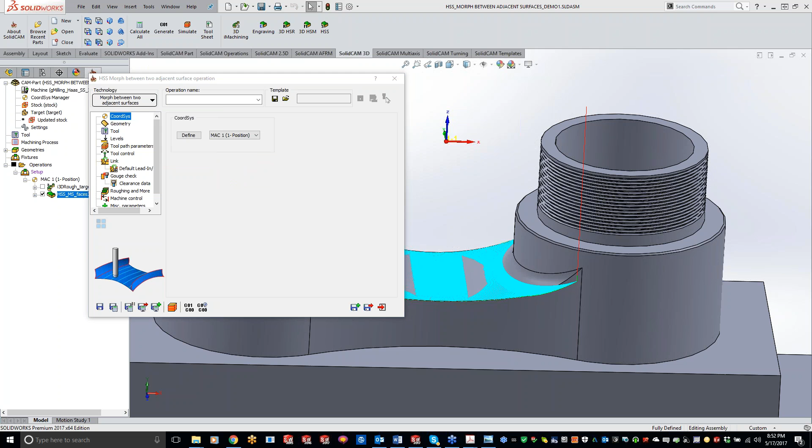Looks like Carlos gave me a website. Oops, I'm getting lost here. Check out this video, let me just grab this for you guys real quick. Oh, here it's talking about it.

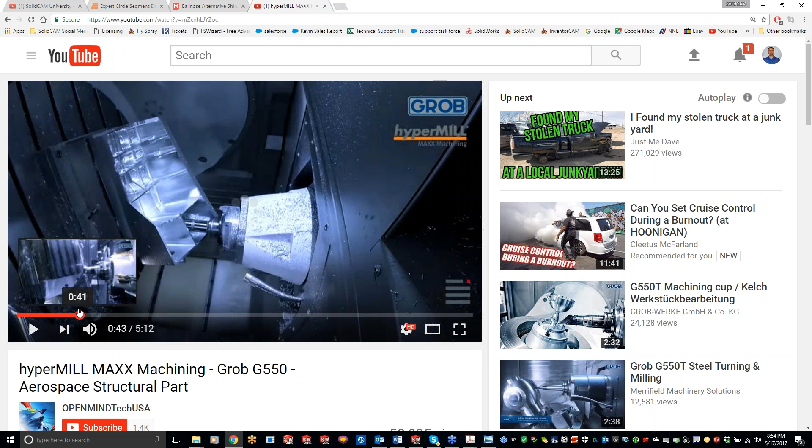Yeah, there's a lot of stuff on YouTube for you guys to check out. But definitely looks like this one is a good article here talking about that barrel cutter. So definitely check it out.